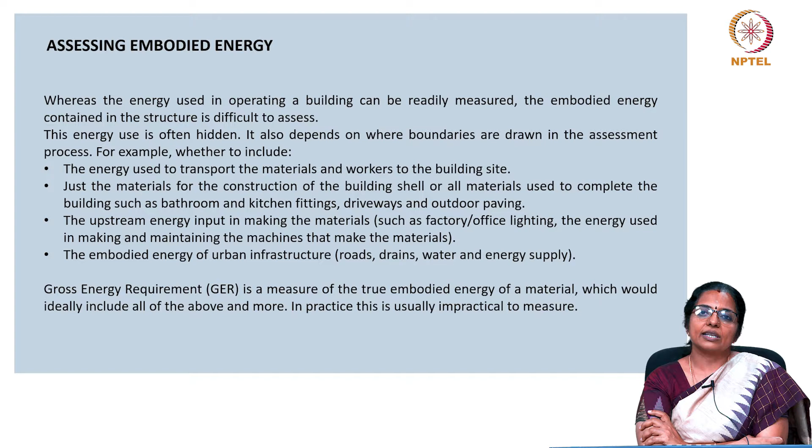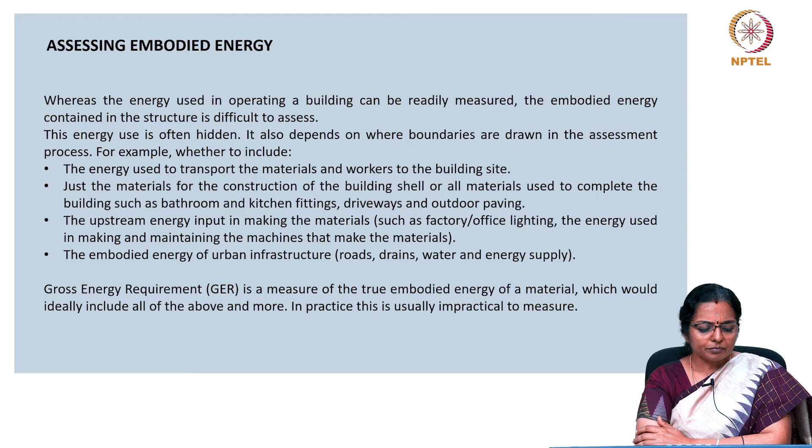Should we include this or should we not include this? In which all components should we include this? In which all components should we not include this? So there are many boundaries which we have to set when we start calculating embodied energy, and that is a real challenge. The gross energy requirement is a measure of the true embodied energy of a material, which would ideally include all of the above and more. In practice, this is usually impractical to measure.

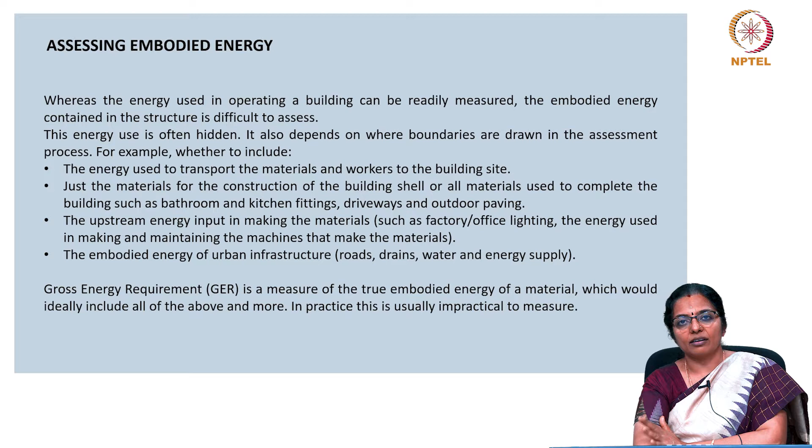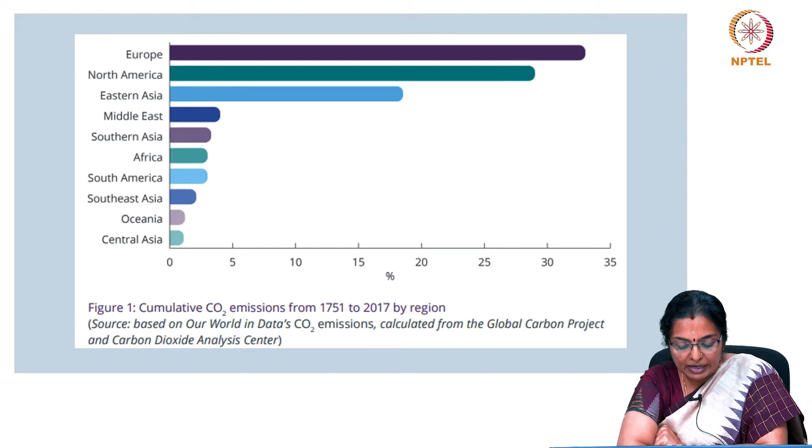Let us just have a look at the carbon dioxide emissions from 1751 to 2017, region wise.

Now, it must also be recognized that India has contributed little to climate change historically. The Intergovernmental Panel on Climate Change, IPCC's 6th assessment report, clearly noted that South Asia's contribution was only about 4% of historical cumulative net anthropogenic emissions between 1850 and 2019, even though the region now includes almost 24% of the global population.

Not to mention the abysmally low per capita global emission of that region. North America and Europe contributed almost 10 times more to global cumulative emissions in this period, though they represent only 13% of the global population.

From this graph, you can see that the carbon dioxide emission of Southeast Asia is by far less than that of either Europe, North America, and Eastern Asia, clearly indicating that the per capita consumption would be very, very less.

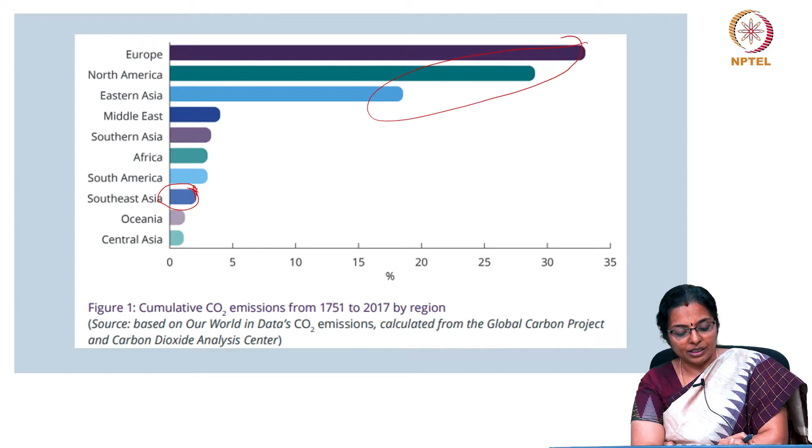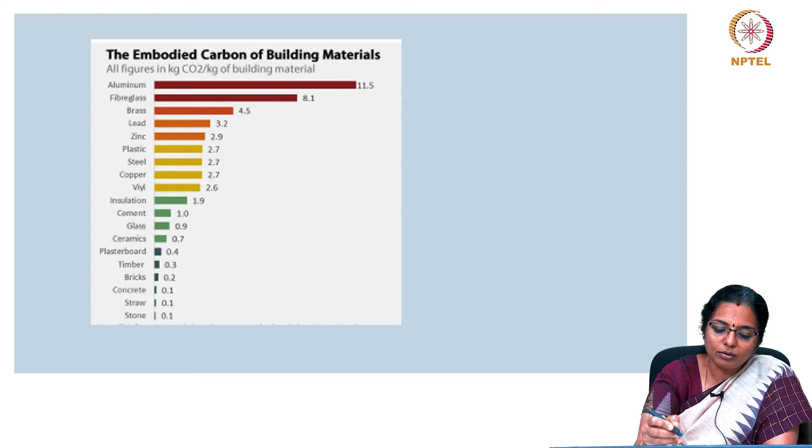Now, if you look at the embodied carbon of building materials, you can see that the embodied carbon of aluminum is the highest. Fiberglass comes next. I am not mentioning brass, lead, and zinc because of the lesser volume of material comprising those. However, steel is an important material which is used in larger quantities.

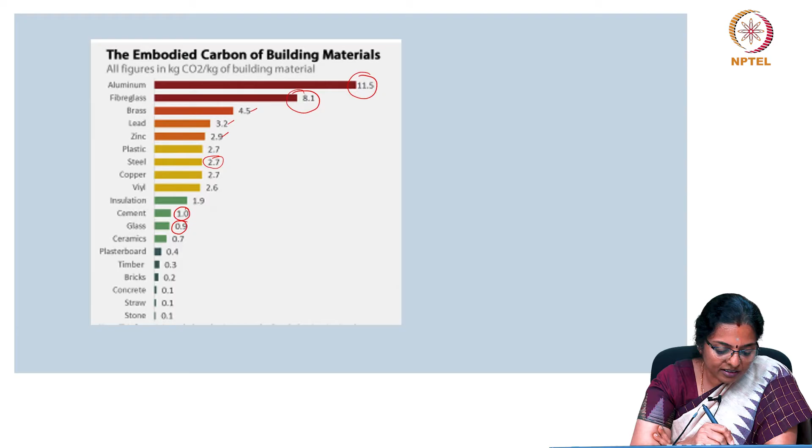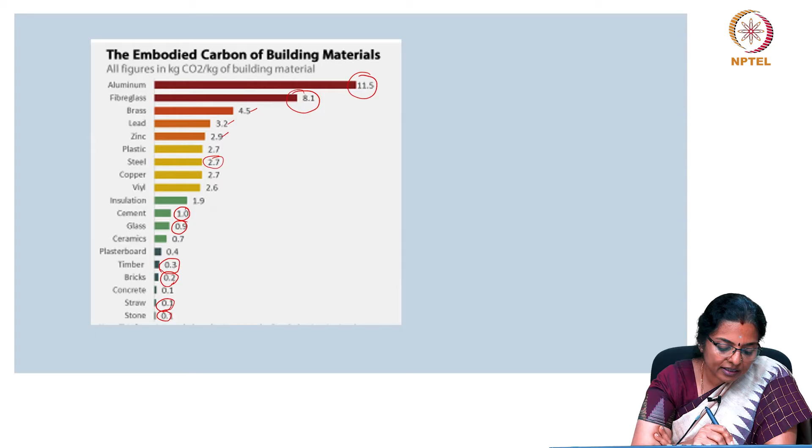Cement is one material and glass is another. The embodied carbon of stone, straw, and bricks is quite less. Of timber it is also quite less, but you cannot look at the embodied carbon of building materials only in isolation. You also need to look at the environmental repercussions of using these materials.

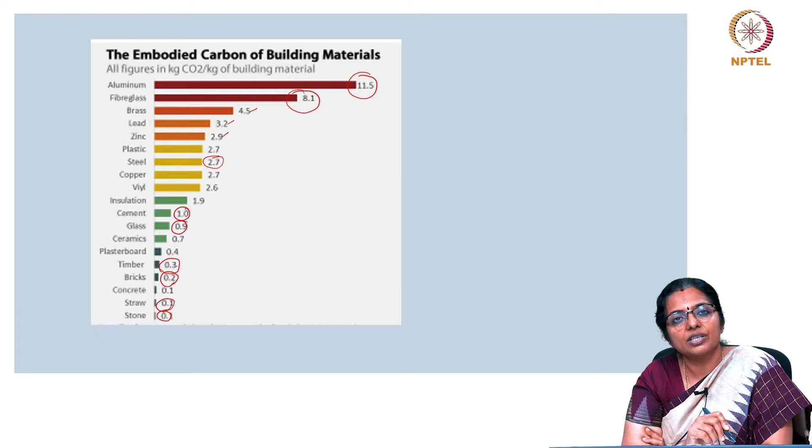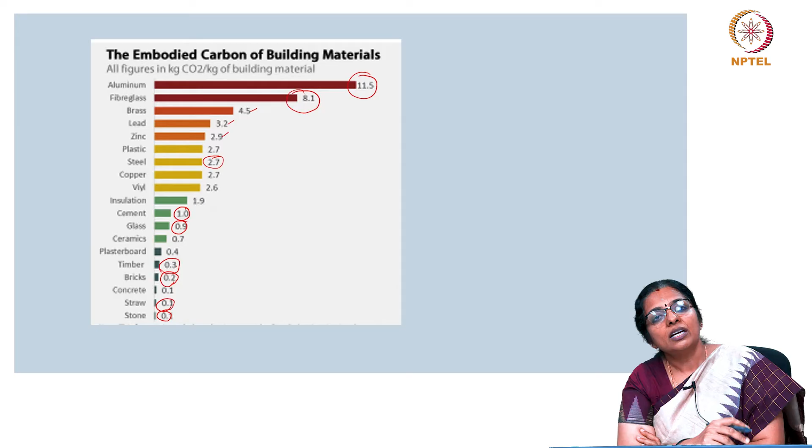For example, the embodied energy of sand is very, very less. But if we start using excessive sand just to prove that the building is low embodied carbon, it is going to harm the environment aggressively. So you need to have a balance and understand energy and environment together.

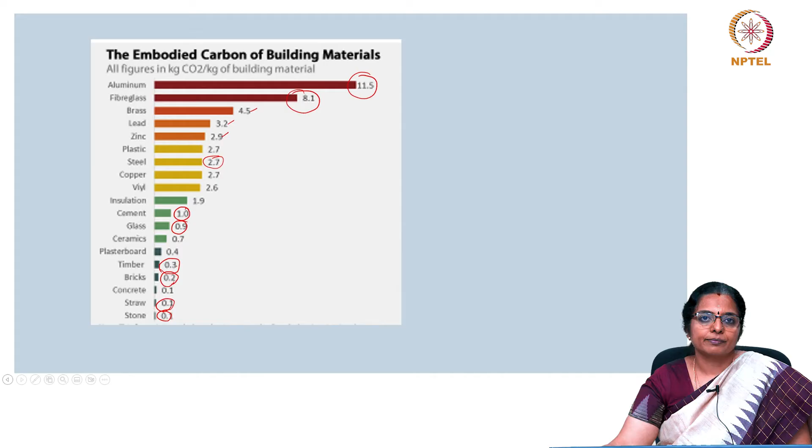A thorough examination of data sources ensures the development of models with the best available data. Whenever feasible, we are talking here of data on embodied energy and global warming potential results for the Indian construction materials database.

Whenever feasible, data on Indian production processes are prioritized for technological and geographical accuracy. When Indian-specific data is lacking, European production process data is used, adjusted for Indian production conditions. Likely technological differences between Indian and European production are assessed and discussed with stakeholders to maintain data representativeness.

All key data sources in material model development are referenced with information on input materials or fuels provided. Data confidentiality constraints, especially from the GABI database, may restrict licensing of unit process data or individual inputs and outputs for some sources. Hence, what you see as data from the Indian industry may not be a result of research exclusively obtained from Indian industry.

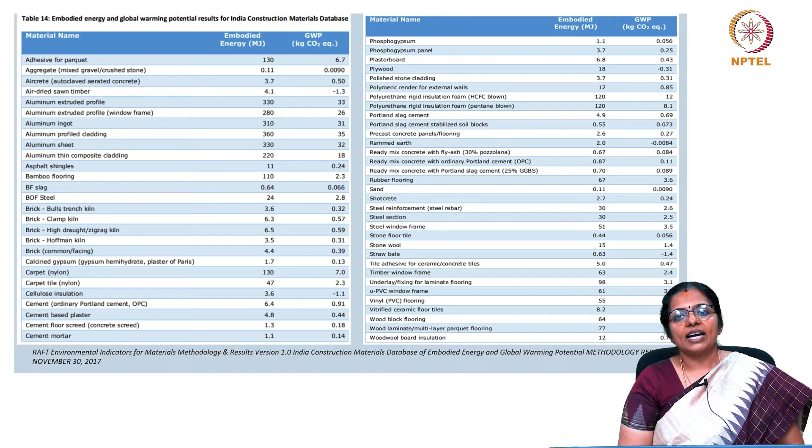Geographical alignment is important. Life cycle inventory models are designed to be reflective of product consumption in India. In cases where the product is typically imported, the production geography in the dataset aligns with the country of origin or source mix from which the product is imported. Based on these extrapolations, the embodied energy and global warming potential results for the Indian construction materials database is being evolved.

Having come to this, if there is a better way of working this out, then this will be replaced with that data.

As of the data we have, you can see that aluminum extruded profile has a global warming potential of 33 kg carbon dioxide equivalent. All these high numbers of GWP relate to aluminum in some form or the other. No other material comes that close to aluminum, and the ones which are low on global warming potential — straw bale is minus 1.4.

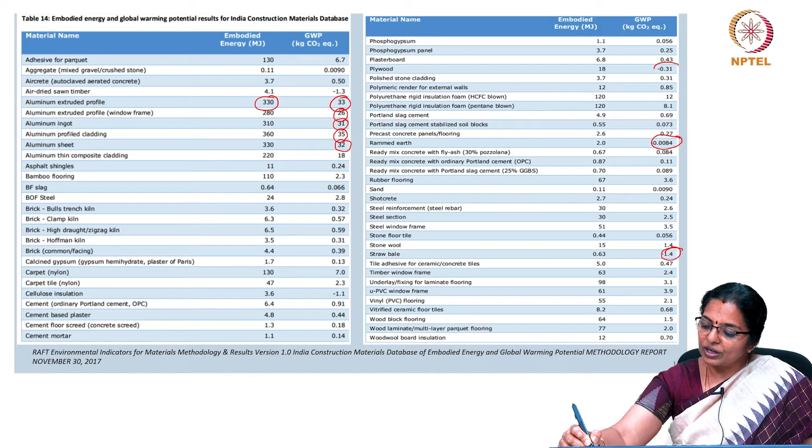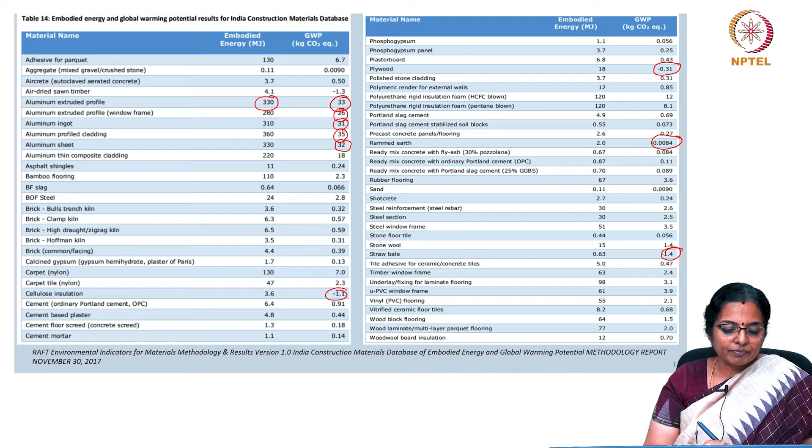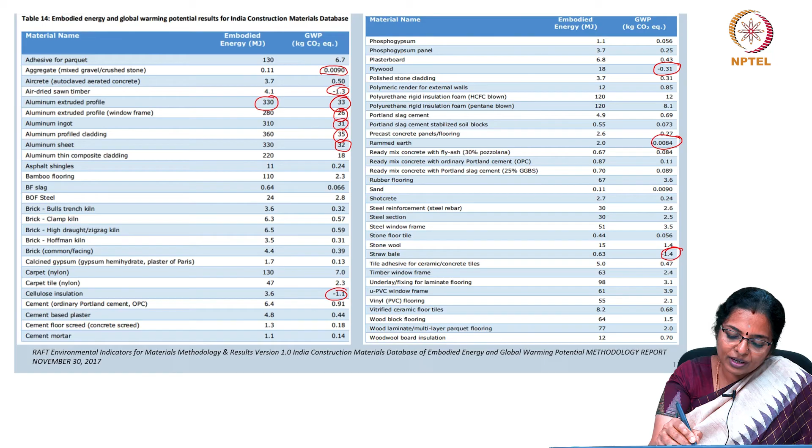Rammed earth is minus 0.0084. Plywood, which is also largely from waste, is minus 0.31. Cellulose insulation is minus 1.1 based on how it is manufactured. Air-dried sawn timber is also minus 1.3. Aggregate and crushed stone is 0.0090, almost close to 0.

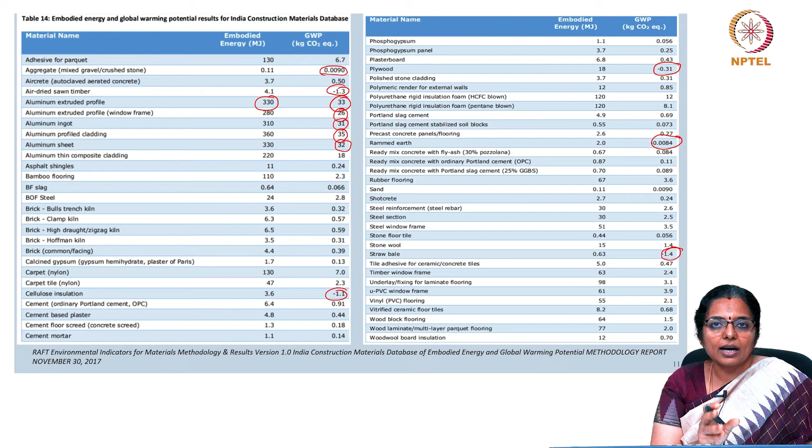So you can see that embodied energy and GWP are more or less correlated. More the embodied energy, more is the GWP, and less the embodied energy, less is the global warming potential. Based on this data and the quantity of building material to be used in the building, we can make the right material choices to ensure that our building has moderately low embodied energy and its global warming potential is also low.

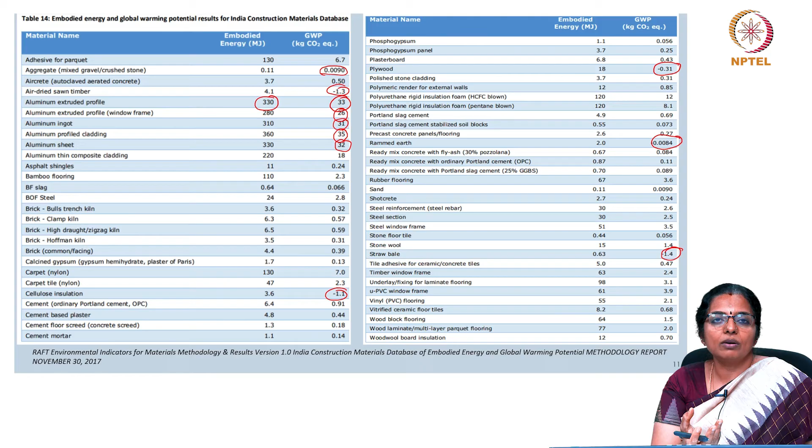Let us now look at the key principles for selecting low embodied energy materials. No product or material will be perfect in every respect. As an architect, we have to consider a wide range of information and possibilities and then try to select the best solution, which will be a combination of how much is the global warming potential, how much is the embodied energy, and how much is the quantity of material used. Source heavyweight materials locally.

Heavy materials like stone, aggregates and bricks should be purchased from local quarries and manufacturers because of the high amount of fuel required to transport heavy materials. Lightweight materials, however, can be sourced globally, since the proportion of embodied energy linked to transport is much smaller for them, for example aluminum or PVC, especially when compared to the energy used in their manufacture.

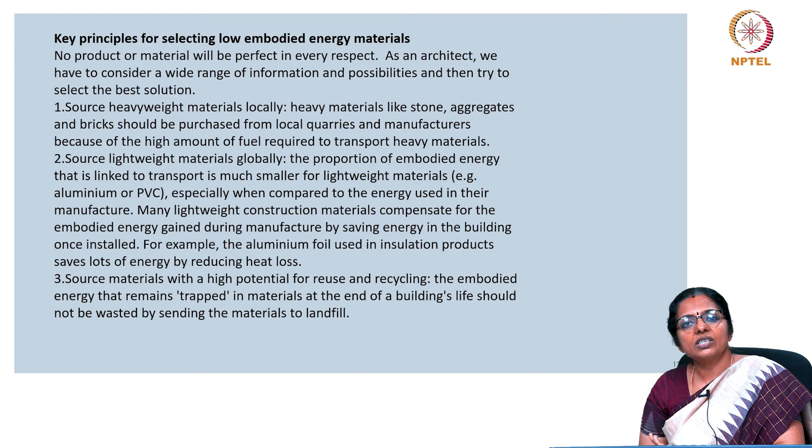Many lightweight construction materials compensate for the embodied energy gained during manufacture by saving energy in the building once installed. For example, the aluminum foil used in insulation products saves lots of energy by reducing heat loss. So aluminum is not to be demonized after all, because the amount of heat loss it saves overpowers the embodied energy it actually consumes.

Source materials with a high potential for reuse and recycling. The number one material that will go into recycling is aluminum. It's a very good material when it comes to recycling. The embodied energy that remains trapped in materials at the end of a building's life should not be wasted by sending the materials to landfill.

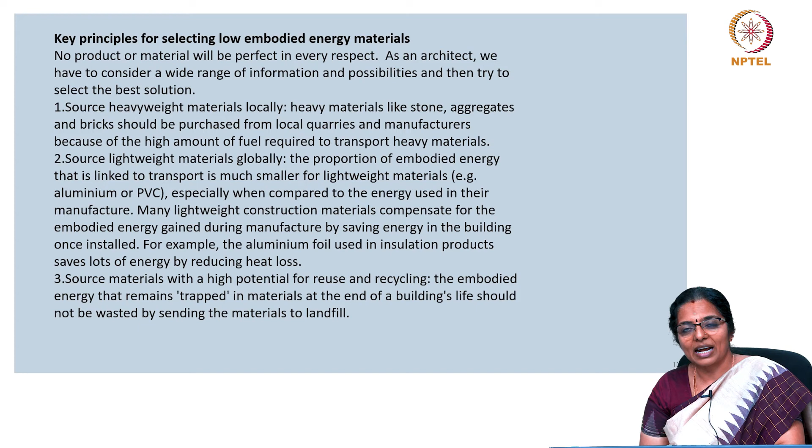Now let us look at the policy interventions required in India. To enhance emissions reductions throughout the life cycle of building and infrastructure, it is proposed that key actions for central and state governments, as well as national bodies, must be taken. Certain recommendations have been given.

One is operational carbon in building regulations. National bodies such as the Bureau of Indian Standards should enhance existing building codes like the National Building Code (NBC) to address operational carbon from the outset of new building design. It must introduce metrics that measure building performance through carbon emissions alongside traditional energy consumption metrics.

State governments should develop comprehensive guidelines for retrofitting existing buildings while emphasizing passive measures. Operational carbon management must also be mandated and regulated. Under this, mandate the annual measurement and reporting of energy use and associated emissions for large non-residential buildings at the state level, so energy intensive buildings must be monitored continuously or periodically.